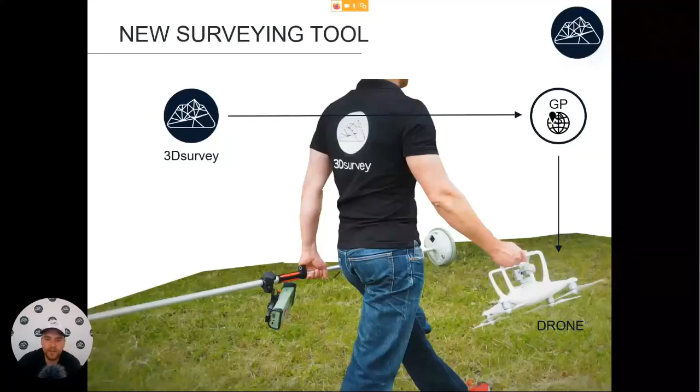So now let's go ahead and talk a little bit about today's program. So first, we will make some short introduction to photogrammetry and 3D Survey. We will talk about the drones that are available for purchase, what are their benefits, which ones make the most sense to buy. We'll also do some theoretical facts about drone technology, about photogrammetry and 3D Survey, how to map with images, how to do 3D modeling, and in the end, we will have some real case presentations.

So we will go through a project together in 3D Survey, from importing images to processing them, and then hopefully we will have time for a few additional case studies to check everything that's possible. And in the end, of course, there will be questions and answers and conclusion.

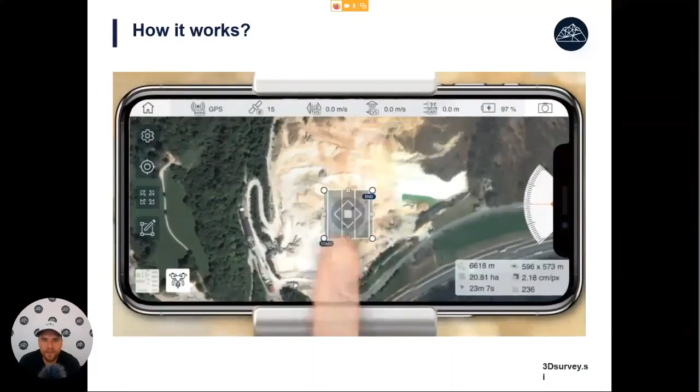Okay. Now let's have a quick look at how this technology actually works. So the 3D Survey ecosystem consists of software for piloting the drone and software for processing the data. So as land surveyors, what we do now, we just come out onto the field, we start up the machinery, go into the application for planning the flight, and we select an area of interest that we want to fly over.

We can set some flight parameters like flying height and overlap. After we are done, we just press upload the mission. We press a button and the drone will take off. So in 15 minutes time, it can cover an area of 500 by 500 meters. So that's pretty good. Or it can map a distance of road of more than 1.5 kilometers.

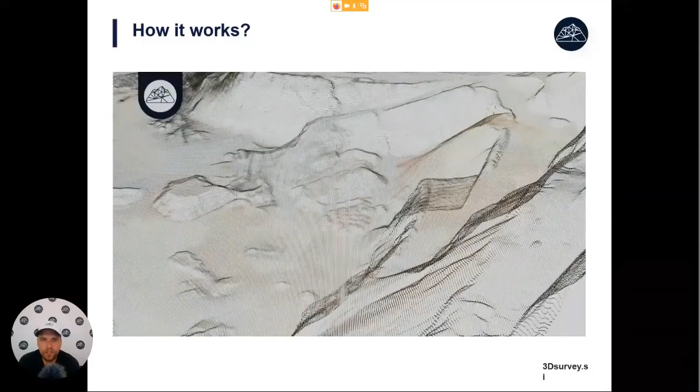After the flight is done, we get a lot of images. These we transfer to our PC where we process them and we get some final results. The first result type is the 3D point cloud. So this is a cloud of points, usually a few 100 million. It makes a very good representation of the natural environment. Out of the point clouds, we can create some 3D models, so watertight models, which can be used to extract contour lines from or calculate some volumes.

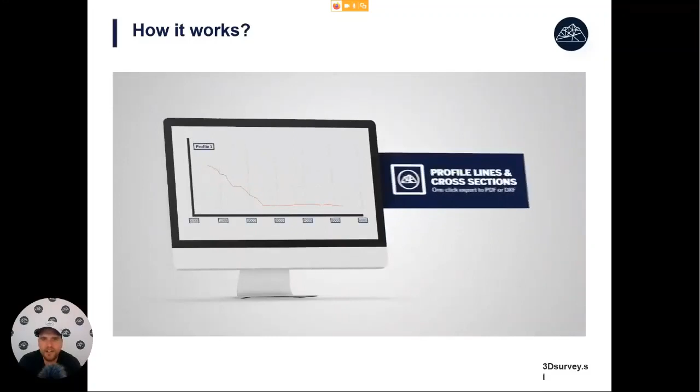So volume calculation is especially simple. All we have to do is select an area of interest and press calculate volumes. Also profile calculation, that has never been easier. All we have to do is select where we want to have these vertical cross sections and press calculate. So no more walking on dangerous cliffs.

And then last but not least, there is also a free viewer available. So here we create very accurate 3D models that your clients might not be able to open. And to empower them to use this 3D data, there is a free viewer with which you can just share these results so that the users can enter them and maybe make some simple measurements.

So for anything more complicated, of course, this is not included. Like volume calculations, you need to have 3D Survey for. We don't want to have your clients calculating volumes without you.

Okay, let's have a look at some bullet points of why to use drones in land survey. So they are proving to be a very effective method of getting spatial data, which is what we land surveyors do. They are also an independent method. You know, I started working in land survey as a student some 15 years ago. And very often when doing mapping, we would make some errors. So you mislabel some points when you map them with a total station, or you incorrectly connect some excavation site, and you can very quickly make a gross error.

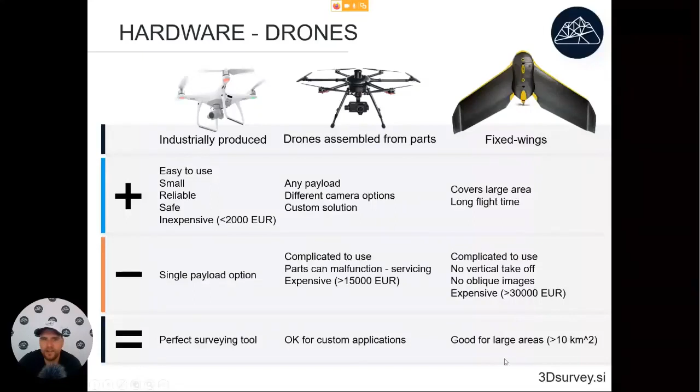The downside is that they don't have any oblique images and they tend to be quite expensive, so north of 30,000 euros. But they can be very good for mapping very large areas, like a new railroad project or a very big open pit mine. For areas over 10 square kilometers, these are the best way to do it. For anything smaller than that, I would go with the first option.

They have gyroscopes inside, which is one of the most important things that allow them to fly, because it tells them which way is up, which way is down. Something very useful is that most of them also have photo sensors. So if you try to crash them into a wall, they won't go. They will stop in front of the wall and start beeping. And some have IR sensors so they can also see in the dark.

So let's talk a little bit more about cameras. A few years ago, when we were starting with photogrammetry, people were using what we called metric cameras. Here we see an example of a metric camera. This one is called UltraCam. It's produced by Microsoft. These were the tools that were used to map countries or do photogrammetry. This kind of camera used to cost somewhere around $1.5 million, so not many companies were able to afford this kind of device.

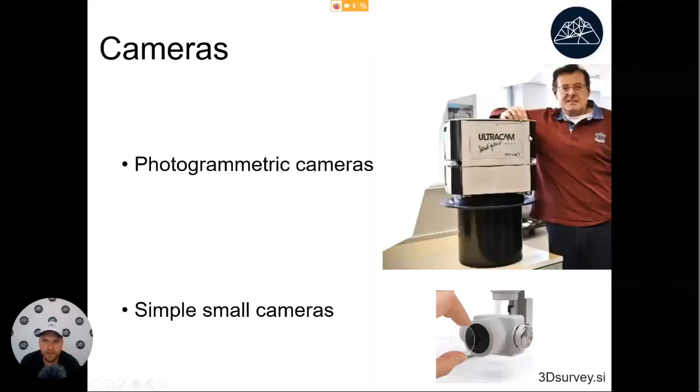What has happened in the last 10, 15 years is that the algorithms we use in photogrammetry became so much more advanced that we can now get better results from these simple small cameras than people got 15 years ago. This is an example of a drone camera. Its total weight is probably around 100 grams. And surprisingly, out of this one you can now get better, more accurate results than you would get out of this monstrosity that weighs 100 kilos.

Okay, when we talk about cameras, there is one important thing we have to talk about. And most people don't know about this one. But when it comes to cameras, there are two types of cameras. I think we have all seen this kind of an effect in videos. So wait, just a second. This is called rolling shutter effect.

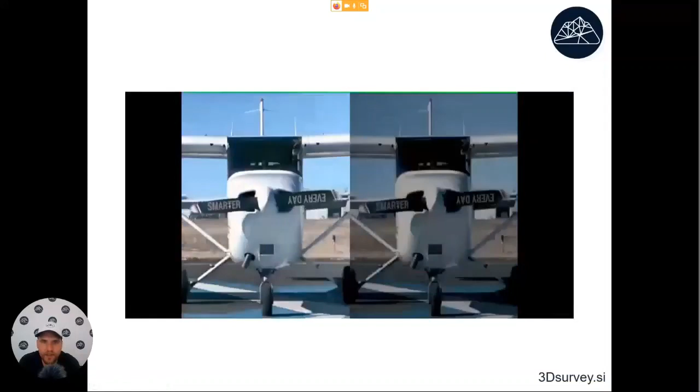And what causes this? So some cameras make the picture simultaneously. The whole picture is recorded at once. While other cameras, they are called rolling shutter cameras, and the picture is taken like that, line by line. So it turns out that when it comes to mapping, the most important thing is to have a global shutter camera, in order to get a nice picture without distortion.

Why is that? Because this distortion is hard to model. In order to model it, we need to calculate how fast the drone was moving, because the speed of the camera governs the effect of this distortion. So for most accurate results, we recommend you to always use drones or cameras with global shutter.

So the problem is, a few years ago, most of the cameras on the market were only rolling shutter cameras. So okay, this rolling shutter effect, it will be eliminated computationally. But if this effect is not present to begin with, we will be a lot better off.

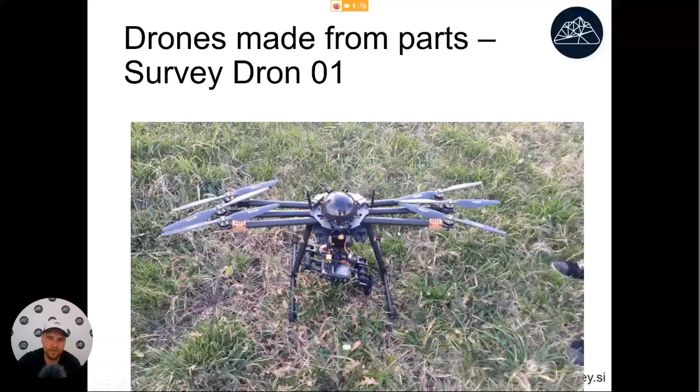Of more than 1,000 people I know that are using it, I know only of 2 crashes, and even those 2 were due to user error. After doing a survey, they were flying around and taking some pictures in manual flight, and then they maybe flew too close to a tree that had no leaves on it, and it got tangled into the branches and fell down.

But even those were pretty inexpensive to fix, so they just sent them back to DJI. DJI took out all the parts that they were able to use, and they sent them a refurbished drone for something around like $700. So for half of the price. So that's a pretty good one.

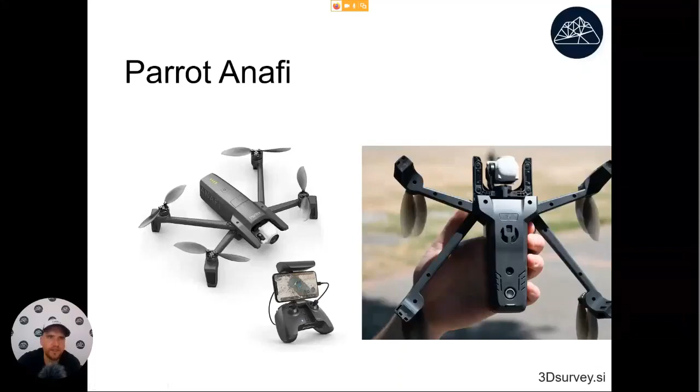Some clients don't want to buy DJI products because they are Chinese. So if you don't want to buy Chinese products, I think this is the best solution, for those people who want to have quality at an affordable price. Here in Europe and in the United States, this will mostly be government institutions, because they have some security concerns, and I think this is the drone to use for those kinds of applications.

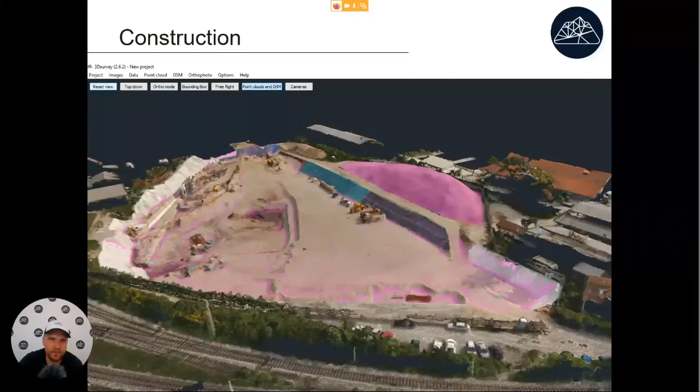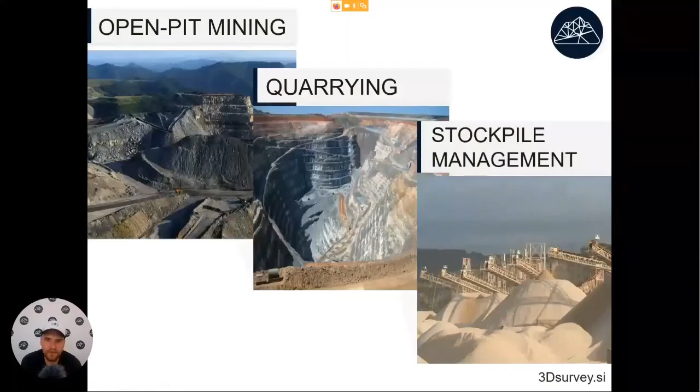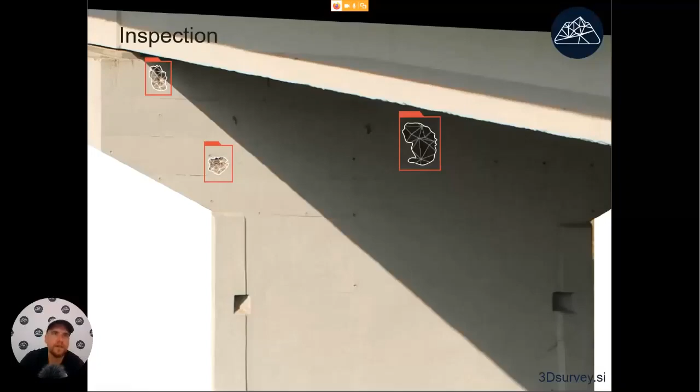Okay, last but not least on our list is the emergency response. Because drone survey is so fast, it's very useful for this kind of application. Sometimes you'll have some rock falls. You will maybe need to know how many trucks you need to take away this material.

Very often when we have this kind of project, there will be some geologists. In order to plan the defensive measures, they will need vertical cross sections to plan some defensive nets to stop the fall of rocks. With drones, we can get these results very fast. Actually we can have the results done the same day, so this will allow us fast response.

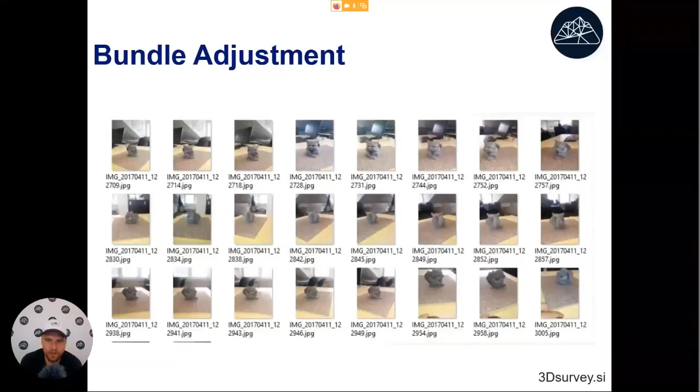If we have some images recorded from various angles of one object, and we don't need to have any information on the perspectives that the images were recorded from, just the images themselves will be enough to calculate the basic 3D shape of this subject, and they will also allow us to calculate where the images were recorded from. So now let's talk a little bit about how this is possible. We are calculating where the images were recorded from, and we are already calculating also the basic shape of the terrain.

So how this works: the whole bundle adjustment algorithm, we can split it into 3 parts. The first part is detection of feature points. There are some algorithms that allow us to detect interesting points. These points will sometimes be like a corner or like a blob or something. This first algorithm will find these kinds of interesting feature points. And for each of these feature points, it will calculate what is called a descriptor. It's like a fingerprint, a number that describes this point very well.

Then the second step of bundle adjustment is feature point matching. When we have feature points and descriptors, we take the first point on the first image and we compare it to the first point on the second image, and we see how well they match. We do this for all possible point-to-point combinations, and we try all possible image combinations. In the end, what we get are 2D matches between images.

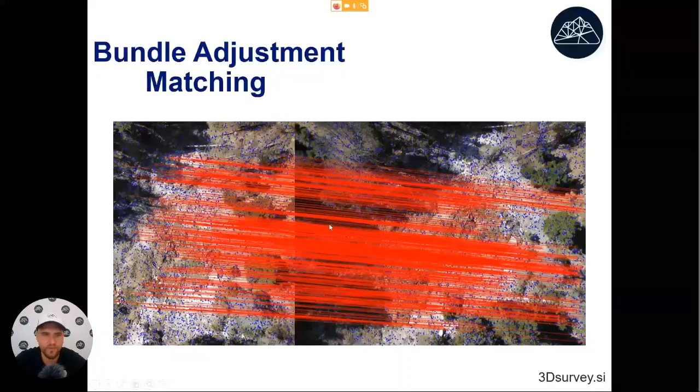So we have image 1, image 2. If they have a similar scale, then the matches will be like that. They will go in parallel. If they have different scales, they might go like that, or they can even be rotated, but always there will be a certain pattern to them, and that helps us distinguish the right matches from the wrong ones.

Then the main part of bundle adjustment is calculating the 3D data out of these matches. When we start, we don't have any information on how the images were recorded, one in relation to the other. It actually turns out if we have at least 5 matches between 2 images, we can calculate the solution, how the images were recorded one versus the other, just by making sure that all the rays intersect. There's actually some quite interesting math going on here, but for this demonstration I will just skip that part.

What's important to know is when we have matches, we can calculate how one image is recorded in relation to another, and it will also allow us to calculate the 3D positions of these feature points. So this is similar to the old days when we had total stations that were not yet total stations, but only allowed us to measure angles.

So you would place a theodolite on the first point and measure vertical and horizontal angles to some detail points. Then you would move to another one and again measure those detail points. And in the end, you would triangulate those 3D points. Well, here we also must calculate some more information. That's why we need to measure more points from the same positions. What's important is that these matches allow us to calculate the bundle adjustment.

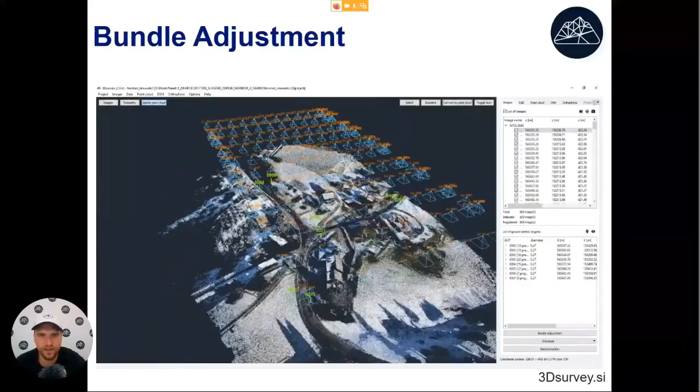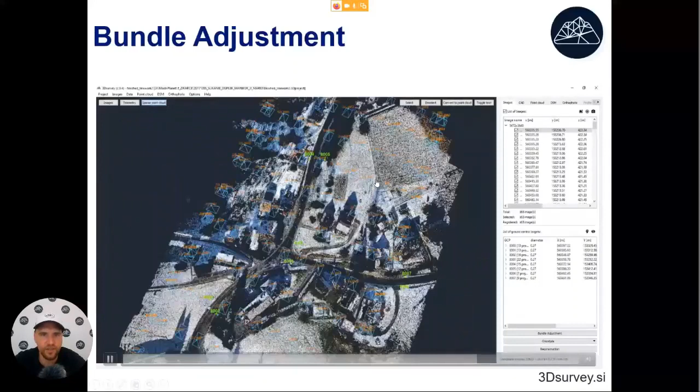So the result of bundle adjustment will probably look something like this. If we have a grid of photographs, it will allow us to create what is called a sparse point cloud. So these are those feature points in 3D, and it will also allow us to calculate the accurate positions where we recorded photos from and what angle the camera had when the photos were recorded. So that's the first important part. You will see later when we go to the software that it's completely automatic. You just press bundle adjustment, next, and it happens all automatically.

Then there is the second part. We need to make the 3D data accurate. At first, bundle adjustment may use some telemetry information from the drone, but usually it will not be correctly placed or rotated. So in the next step, it's important to make that data accurate. The best way to do that is by using some ground control points. So we have an option to georeference with ground control points.

Prior to the flight, we will place some ground control points on our terrain and we will measure them with a total station or a GPS. And then in the next step, we find those ground control points in our photos and we use that information to make our results accurate. Another option is to georeference with telemetry information. We can do that if we have an RTK drone that has centimeter-grade accuracy of camera positions.

And in that case, an even better option is to georeference with both GCPs and telemetry. Because with telemetry, you still have to know the drone is flying. For each measurement, it will have less than 1 second. So it's like mapping with GPS and only taking one measurement for each point you measure; it might not be accurate enough. So even if you have RTK GPS, it's still best to georeference with both GCPs and telemetry.

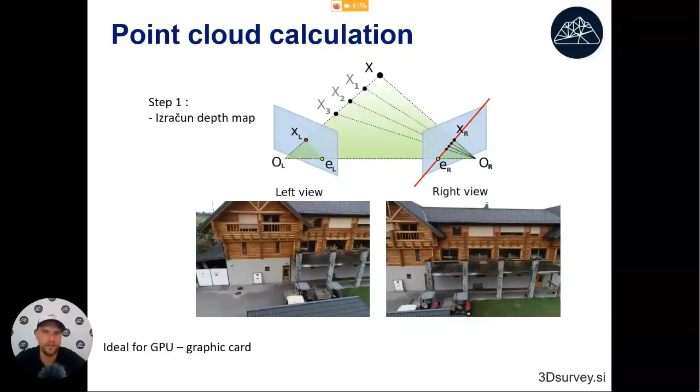Because we have to do that for millions of pixels at a time, this is ideal for GPUs, because GPUs have 1,000, 2,000, 3,000 cores. That means that you can calculate 1,000 pixels at a time, and in the end, if you have a GPU, it will allow you to get better results in less time.

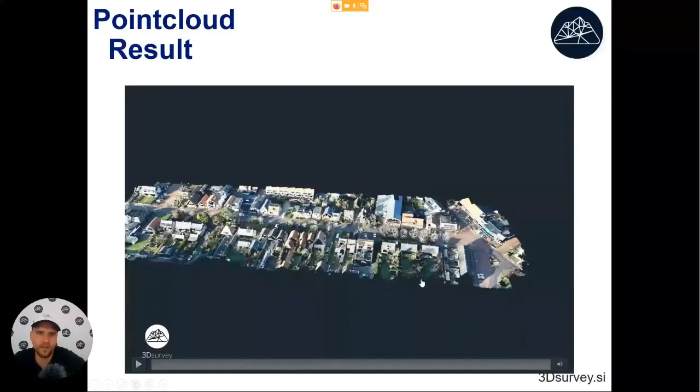Our result of point cloud calculation will look something like this. So here we have a nice point cloud of an urban area. This one is actually the Netherlands, I think. This was one flight with the drone. I think the length of this is maybe around 400 meters by 200 meters, so a small area. And the point cloud here has everything inside: all the trees, all the buildings, all the building boundaries, the fences, and this kind of stuff. So it's pretty interesting what the technology now enables. Because with a total station, we would probably need a few days to map this kind of area.

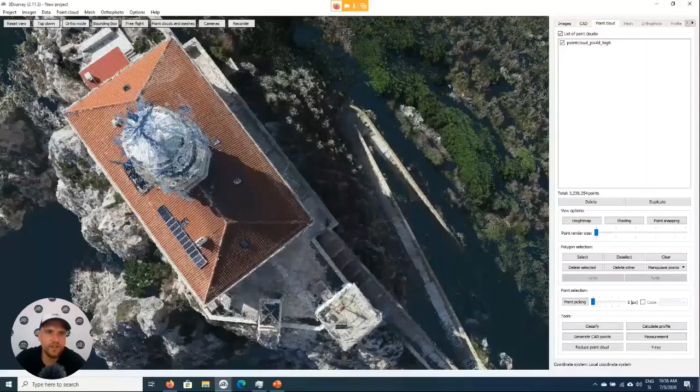Okay, let's check out an example of a point cloud. At this point, I would like to talk a little bit more about the point cloud. So let's see a real example. Here I have an example of a point cloud. This one is actually not created in 3Dsurvey, but in one of the most widely used software packages available. When we are calculating point clouds, it's very important how we do it. That will govern how much noise we get in our point cloud and how sharp the point cloud will end up looking.

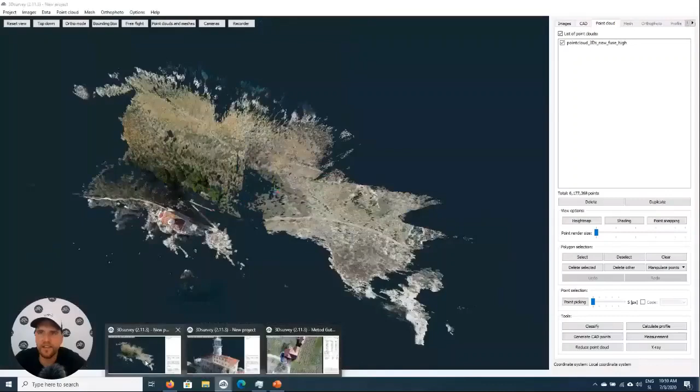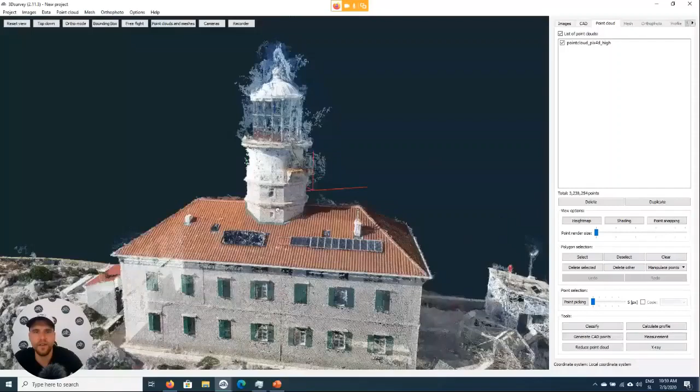So the competitive softwares may get you something like that. On the other hand, 3Dsurvey has one of the best point cloud algorithms available, so you will see that the result is a lot sharper. Here we calculated 6 million points with the same settings. In competitive software, we only had 3 million points, so that's only half. And okay, if only this was available, probably this would also look pretty amazing.

But if we want to map something, if we want to make some line work out of this, then it's very important that this data is as good as it can be. So that's why we also invested a lot of our time into getting this kind of data out of the pictures. We worked very hard in order to make this sharp and with as little noise as possible.

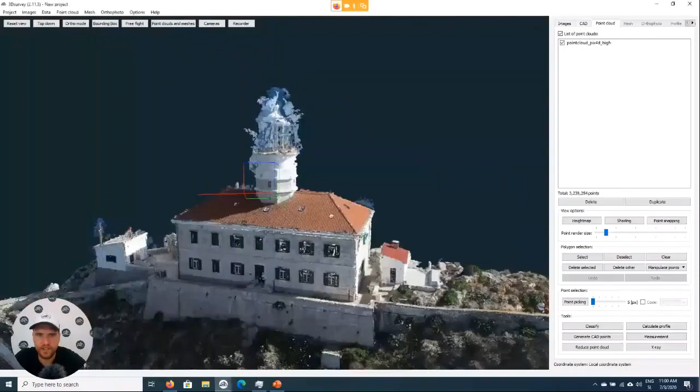So just one more time for the comparison, competition versus us. A lot sharper, a lot more detailed. Here you can even see the people who were flying the drone. Okay, let's go back to the presentation.

Okay. Now with point clouds, an important step of processing is also classification. As land surveyors, very often we need to know what the shape of the terrain is if we want to extract contour lines, for example. So usually when we get the point cloud, the first step will be to do the classification of the point cloud. In 3D Survey, this is very simple. It's a semi-automatic procedure. All you do is select the wizard, press next, next, next, and you end up only with ground points.

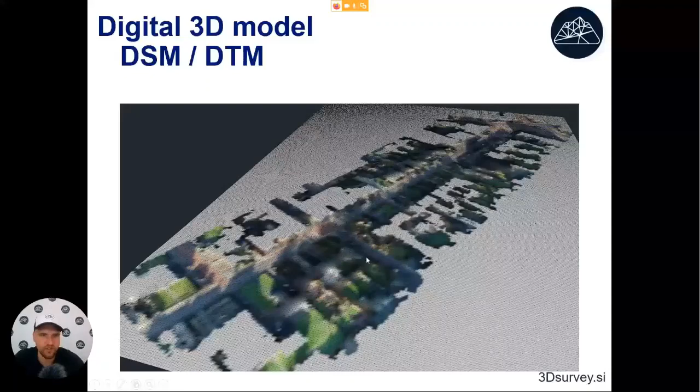So why do we use ground points? We use them so that we can later create a digital terrain model. Out of the ground points, we create a regular grid, and then out of this one, we will be able to extract contour lines and everything like that automatically. On the other hand, if we make a 3D model out of unclassified points, then what we get is a digital surface model, or DSM. This one also has buildings and trees and cars and everything like that present.

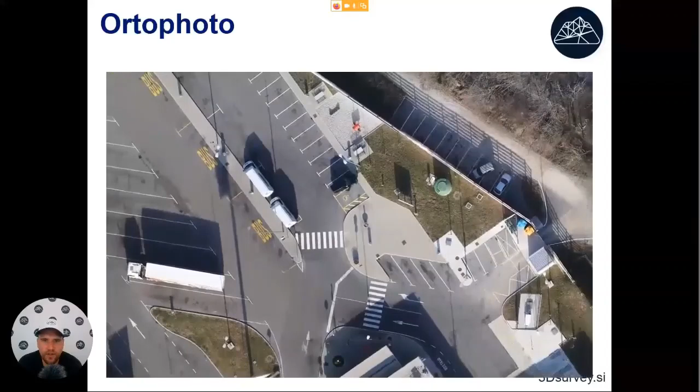So out of this one, you wouldn't want to calculate contour lines, but it can be useful to create an orthophoto. An orthophoto is a Google Earth-like image. If you look at it, you will see all the important stuff that we want to know about will be present in this image. It can be very useful to quickly draw a map of our area of interest because everything is present. So here it will be very hard to make some gross error, like incorrectly drawing where the building edge is, because we just see how it looks.

And now, if the orthophoto is calculated out of the digital terrain model, what we will get is the classic orthophoto. In that case, the building roofs will not be correctly positioned. On the other hand, if we calculate the orthophoto out of the DSM, then what we get is what we call a true orthophoto. In that case, the roofs of buildings and trees are also exactly where they are. So both have their benefits and weaknesses, and we will check that later.

Now let's quickly look at what kind of results we can get from this data. The first one is contour lines. Once we have the digital terrain model, all we have to do is press calculate contour lines. We select the equidistance, press calculate again. It just takes a few seconds and already we have the result. Now this we can export into CAD to be used with our survey drawing. There will be an export available, so pretty straightforward.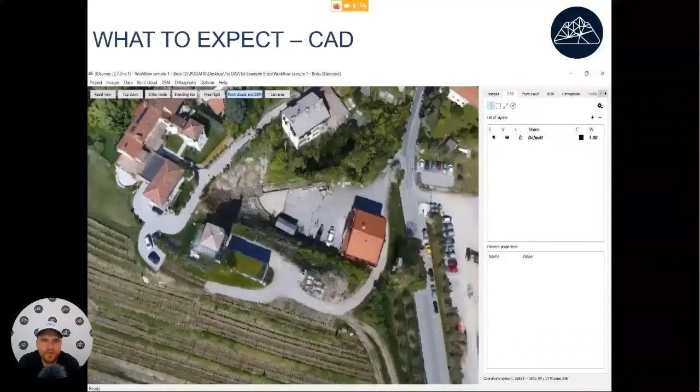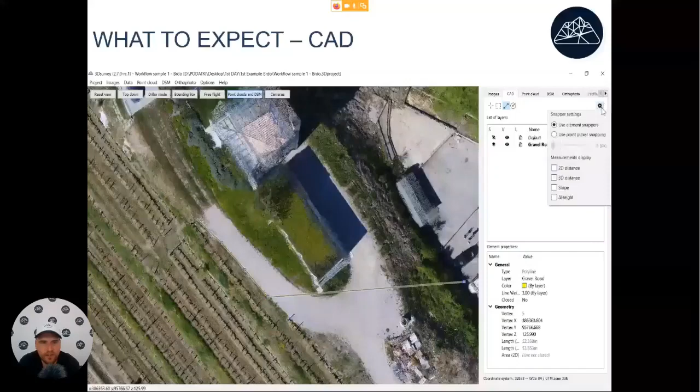Okay, let's go on. Next, one of the most interesting things is the ability to create line drawings. It will take a good team of 2 surveyors probably around 15 to 20 seconds to measure one point in the real world. So if we want to measure 100 points, it will take between half an hour or an hour at least. It will still depend a lot on the kind of terrain we are measuring.

So if we can, on the other hand, just draw these points in 3D instead, this will be a lot faster. Here you see it all. I have been speaking about this now for about a minute, and we already measured here 20 points. So this technology can be around 10 times faster than measuring points in the field, and it will be just as accurate.

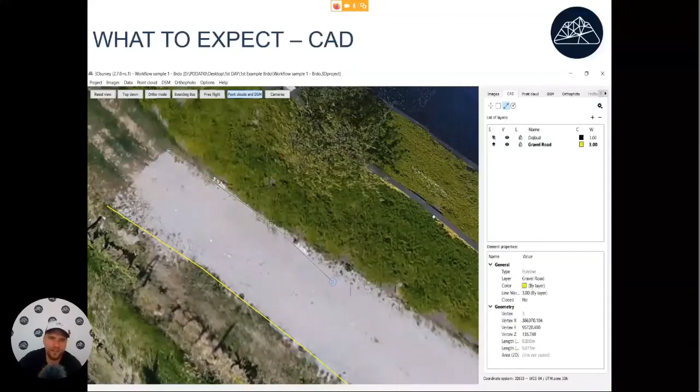We will check later what the accuracy of this data can be, and you will see that the accuracy we can get this way will be around 2 to 4 centimeters. 4 centimeters is something that you can be sure to get, but if you work well, if you make enough ground control points, what you can actually expect is around 2 centimeter accuracy.

So that's about the same as what you will get out of the GPS. And then instead of mapping everything out in the field, you can just make a 3D model and then map in your office.

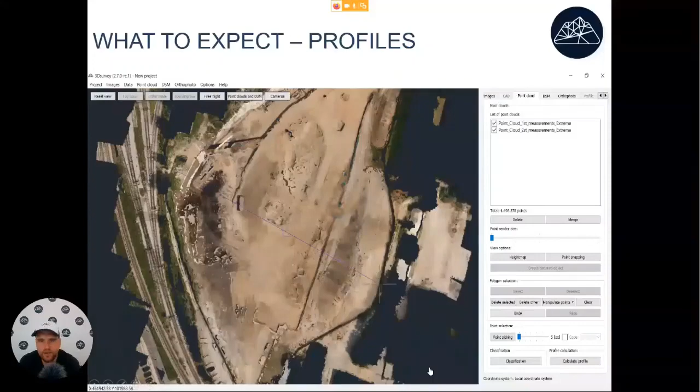Okay, when it comes to vertical cross sections, again, when we have the 3D models, all we have to do is select where we want to have the cross sections and we can just draw them. So, compared to walking down the line and measuring points all the time, again, a lot faster. And there's also an added benefit that after the survey is done, you can just select where you need vertical cross sections.

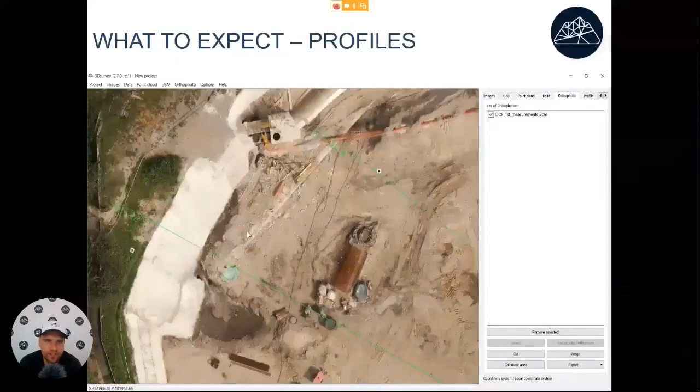So when I was still working as a student, as a regular land surveyor, very often it would happen. We would finish a project, and then a month later, someone would call us and say, "Hey, here we need to have some more vertical cross sections. Please go and make a few more." And then you would have to go there and make them at no additional cost. And it takes time, a lot of energy. Here, if you get that kind of request, you just create a new cross section where they request it, and that's it.

Okay, then volume calculations. So with this technology, volume calculations have never been simpler. Here we have an example. We have two point clouds. So for the two point clouds, we can create two digital terrain models. Then in order to calculate the volume, basically all that we need to do is select our area of interest. So if we were doing this for real, we would do that very accurately. Here we're just doing that real quickly just to show how it works.

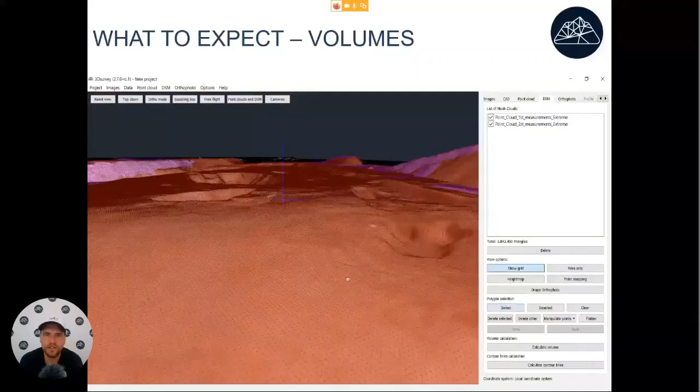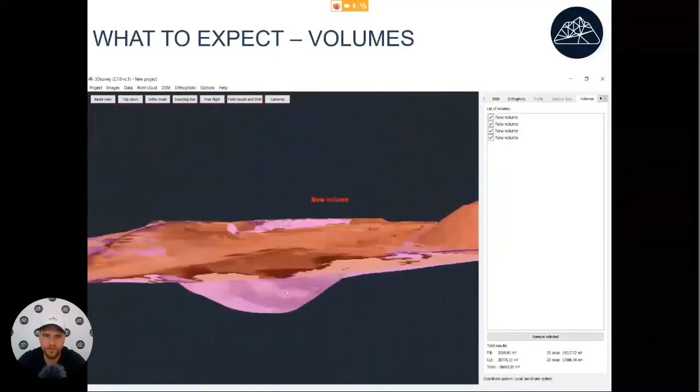So we can then see very well what the difference between the two surfaces will be. Then in order to get volume, you just press calculate volume. You just wait a few seconds, and already you will have the volume calculated. So pretty fast and effective technique. And after you do that, you can also get an automatic report on the volumes, in combination with some vertical cross sections. Projects that would take a lot of time and energy to calculate will be very simple.

Okay, so now also generate report, measurement report. Just select which volumes you want inside, which vertical cross sections, select the name for the file, and what you will get will be a Word document showing you where you calculated the volume, what the volume was, where we have those vertical cross sections, and also the cross section view.

Okay, so we've spent an hour talking.

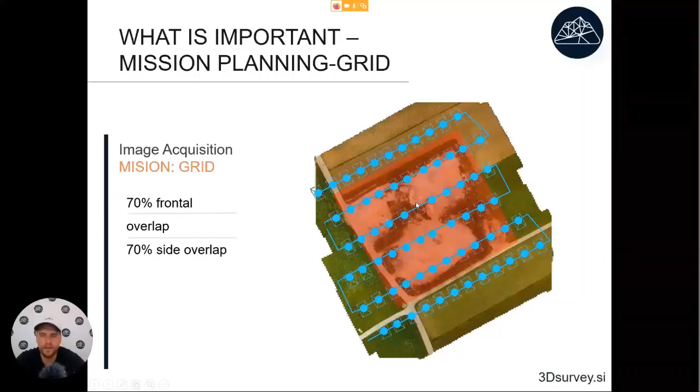So for longitudinal objects like roads, railways, something like that, it will be similar. Here it's important to always use a minimum of 3 lines. Sometimes people fly and they just make one line like that. In that case, you don't have any side lap, you only have overlap, and that's no good. So always you need to have a minimum of 3 lines. If you use 4, start on this point, fly like that, the drone will come back to you. So it will not take much longer than 3 lines.

For very big areas where we map 2 kilometer sections at once, we usually stand here in the middle and then we just fly the 3 lines and it's enough. And with Phantom, you can map up to 2 kilometers. Okay, maybe for a start only map a kilometer or a kilometer and a half. The problem when you do such big distances is the terrain can go up and down. You have to take that into account when you plan this mission.

And then, let's also talk about setting up ground control points. As we said earlier, the ground control points are the most important part that allow us to get good results, and it's important to spread them out nicely. So we will spread them out both horizontally and vertically. Ideally, especially if we are working with stockpiles, we will put one on the highest point, one on the lowest point, and also cover the XY extremities of our areas.

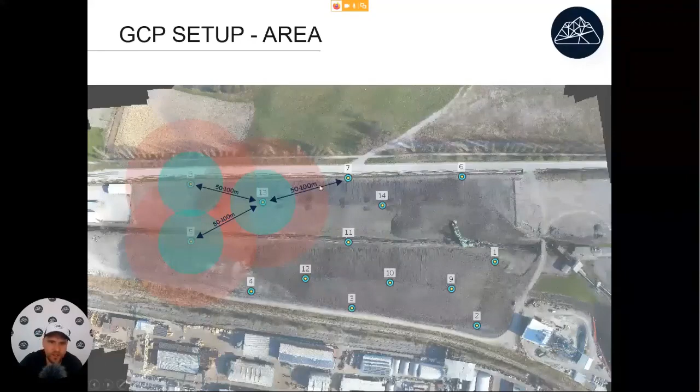And when placing the ground control points, we just try to place them so that the distance between neighboring ones will be between 50 and 100 meters. If we have a very big area, then we can also place them so that the distance between neighboring ones will be 200 meters, something like that.

If we are mapping roads, then the advice is similar. Again, we put them at a distance between 50 and 100 meters, but in this case, we put them on both sides of our linear objects. So 2 here, 2 here, 2 here, 2 here. It's good to place them together because then when we are picking them up, we will work faster if they are not that far apart.

And before we already mentioned the terrain, so our recommendation is when you do mapping, always start the drone from the highest point on the terrain. This is good for 2 reasons. The first one is safety. If you start from the highest point, you're less likely to crash into some tree or something like that. Another important thing to consider is overlap. If you start at some lowest point of the terrain, you set up the mission at 80 meters high so that the overlap will be at 80 meters.

Here the terrain and the house might be 35 meters higher. So here the drone will be only, let's say, 45 meters over this house. That means the overlap will be less than 50%, and that's already a critical value. That means that images are not overlapping over the whole area, and this part may probably not even calculate anymore. So you can get holes in your model. So always start from the highest altitude, and even over the objects you will get good overlap. Just a general word of advice.

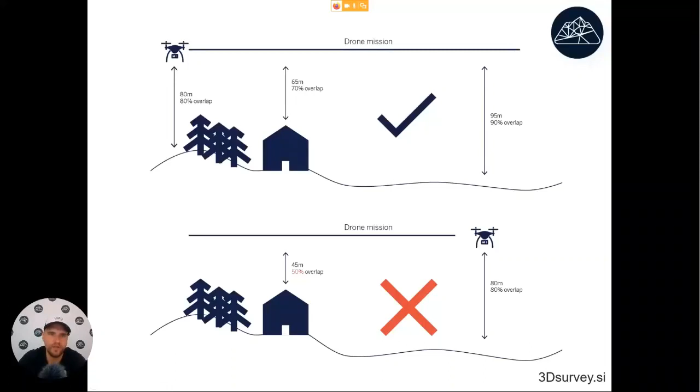Okay. So now we did the theoretical introduction. Now let's look in practice at how processing a dataset works. Let me open a new 3D Survey window, and I have here a nice small project that I can process in real time. So this is 3D Survey. To start processing, we can just click images, load images, or we can click here on new project. Now I'll just move to this presentation folder. I have here a nice small data set of

34 images. After selecting the images, the software asks us if we want to import the telemetry information. Most drones write telemetry information into EXIF data. Other ones will write it in a separate file. Here we can set our coordinate system and our geoid model like that, import.

So what we have now, here we have where we flew the drone, and we also have information in 3D where we recorded the images from. Now, as we said before, what we have here are images and very approximate positions where the images were recorded from.

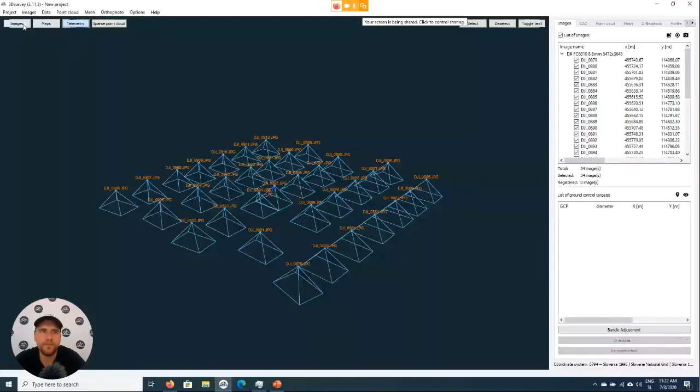Okay, before the flight, we placed around 10 ground control points out on the ground, and we measured them with the GPS. Now let's start the processing. As we said, the first step is bundle adjustment. This one is completely automatic. We just press OK and we start processing.

Bundle adjustment is a pretty fast algorithm. For these 34 images, it will take less than 2 minutes. If we had 600, 700, 800, 1000 images, it would take maybe an hour, maybe 2 hours. Again, it will also depend a lot on the speed of the computer, but it goes up a little bit exponentially. So if you have a twice as big project, it might take 3 times as long to calculate than the smaller one.

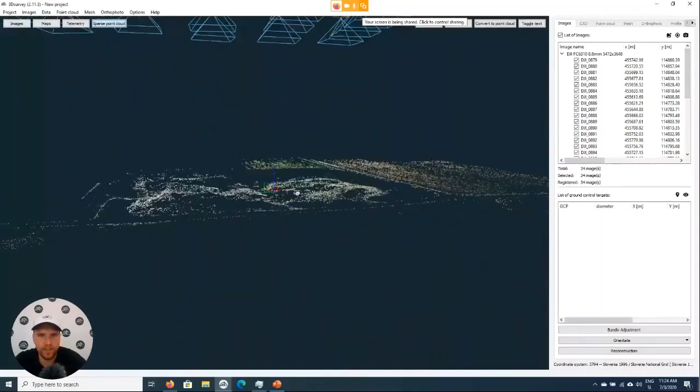So now the feature detection is already done for the images, and those features were matched between the different images. And now the software is already calculating from where the images were recorded. This laptop is a pretty good one, so it will finish just about now. And this is the result of bundle adjustment that we get. We get already the approximate shape of the terrain, and we get more accurate positions where we recorded these images from.

Now comes the second step, that will be georeferencing or orientation. Here we will now add the ground control point information. I have the ground control points here in this GCP file. The file with ground control points just looks like this. We have a point name, easting, northing, and elevation. Okay, let's close this. Import. Now let's go to the next step.

Now here we just need to find the approximate positions of these ground control points. Our software has one of the most user-friendly methods of doing that. Here is already our first ground control point. And these red dots are the feature points that were detected automatically. That's why when we mark one ground control point on one image, we also know its position on all the neighboring images already. And because of that, we only need to mark 3 ground control points.

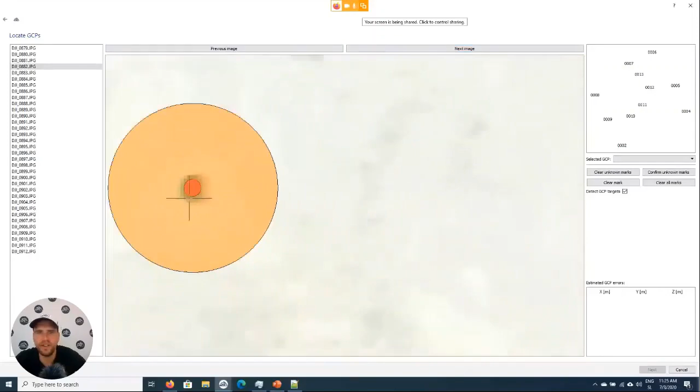Here is already the second one. Ideally you will not mark 3 that are exactly in a line. Usually this won't happen if you select sort of okay. Here is the third ground control point. After we mark the third one, the software will automatically recognize which ground control points we have already marked. Now what we can do is just check. It's important that all the ground control points are inside of this circle.

If we want, we can also improve the position of this one a little bit. Like that. Maybe let's check it also on the other side. So 12. I see this one was causing us a little bit of problems. We'll just remove that one. 13 we will just clear. Okay, now everything fits together. One click was not accurate enough, but now we have what we need. All the ground control points are inside of these circles.

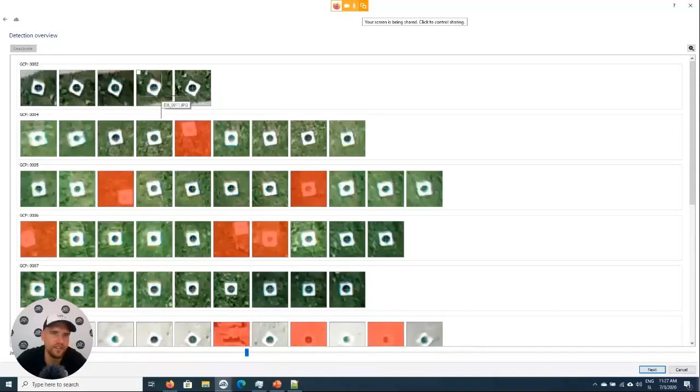Then we have here this detect GCP targets checkbox. The software will go inside of this circle and try to detect the center of the black dot. And here we already have results. For example, ground control point number 2 is visible here on images DJI 899, 900, 901, 911, and so on. Here we just go quickly through it.

We could add this measurement manually, but it has a little too much glare, so we will just disable this one. We just check how the automatic detection went. It went perfect. We could select or deselect points like that. For example, we can remove one like this if we don't want it, but it's okay, so we'll just leave it inside. Then we just press next, and this information gets added to our 3D model.

And then what we get here are ground control point errors. So that's now the difference between where we have measured our ground control points with GPS and where these ground control points are in our 3D model. So here we see that we get around 2 centimeters. That will be the maximum offset.

So a good rule of thumb for this data is to say the end accuracy of the results will be about similar to the worst error that you get in here. So for this one, probably we would get around 2 centimeter accuracy. If one point here would have 4 centimeters or more error, we would just go back and check how that point was defined. Now let's just press finish. And now our model here is georeferenced with these points.

Okay, now let's continue on. So we have here a point cloud. The next step will now be point cloud calculation. This part is actually the one that takes the longest, but in our software you will get the best result available. On my machine it takes around 1 hour to process 100 images. So here we have 34 images that might take around 20 minutes.

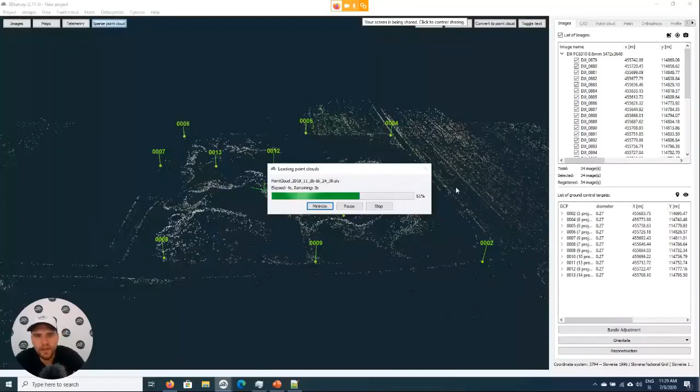Too long for us, so I will just load in a pre-calculated point cloud that I already have here, just in order not to waste any time. And this is the result we would get after some 20 minutes of processing for this small data set. Okay, but this is an area of 100 by 100 meters. So in order to map it, probably half of the day with a total station.

Okay, so here is already our point cloud. We already have a very good feel for the 3D shape of the terrain. But now the first thing we need to do is calculate the digital terrain model. So we will just quickly classify this point cloud, and we'll also see how the classification algorithm works. Here we have some settings for the classification algorithms. These settings really work for 99% of all the cases.

We just press next. The algorithm is semi-automatic. We just select one point on the ground, and the software goes through all the points and checks the height difference between them. If they are on similar height, it will say, okay, this is terrain. Vegetation here is too high, so from here to here there's too big a jump, this is not terrain. So it's very simple, but it gives one of the best possible results. Others use more complicated stuff, but it gives you a lot of wrong information.

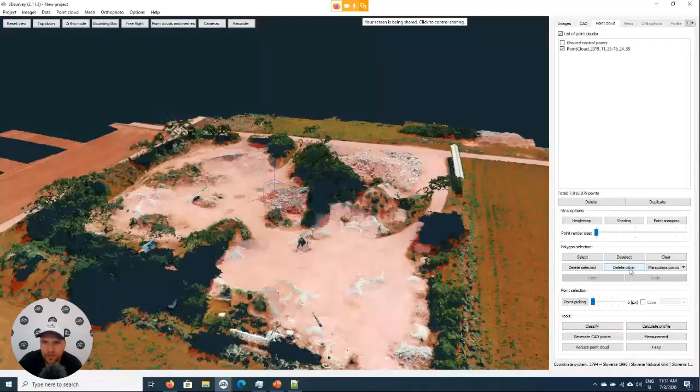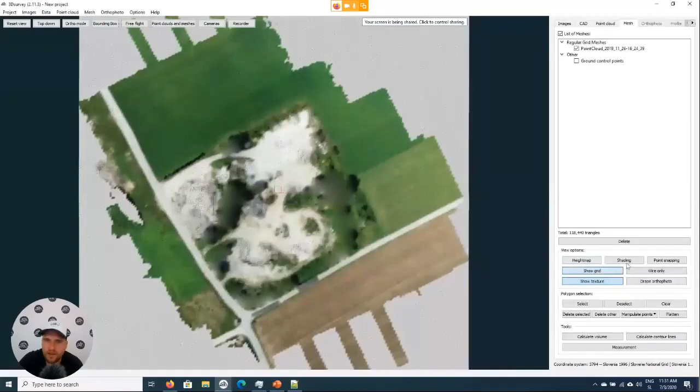Then in the next step, we just do a little bit more filtering. A new surface is calculated, and then all the small bumps are excluded. So now we'll just press finish, and we will use this delete other tool to temporarily delete all the non-ground points. Okay, and out of these ground points, we will now create a new digital terrain model. Just press calculate, and already we have a digital terrain model.

Now, as we saw earlier, calculate contour lines. Just press calculate contour lines, select the equidistance. We can leave it at 1 meter or put it lower, 0.5. Okay, it can be 2/3 of a meter, it doesn't matter. Continue. They are calculated almost instantly.

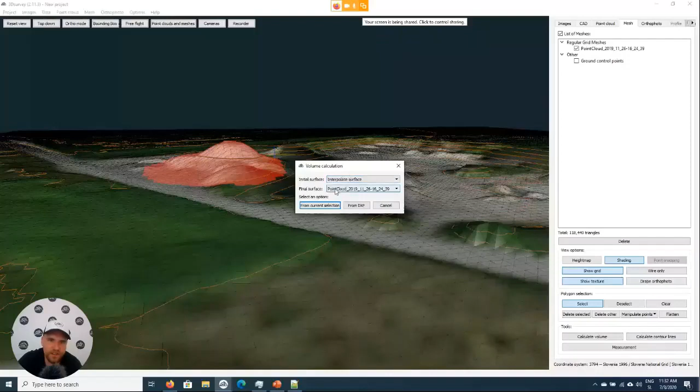On the other hand, if we want to calculate volumes, again, just select an area of interest, just like we showed you, press calculate volume. We will interpolate the initial surface. If we had two surfaces, we could also choose the initial surface. The final surface will be the one that's in the point cloud from the current selection. And bam, we already have the volume, so around 600 cubic meters here.

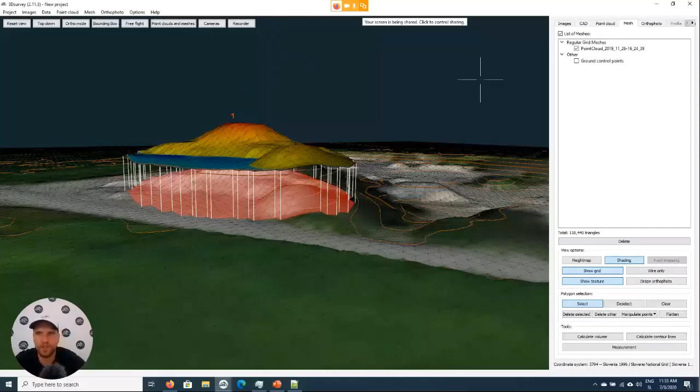The bottom surface in this example gets interpolated out of the boundary. So here you see it goes a little bit up. So it's very important how this bottom surface is defined. This is most suitable when we have a pile of material on flat ground or excavation of terrain from a flat area. For other examples, when calculating volumes, it's best to do measurement 1 before anything is happening, and then measurement 2 afterwards, and we just compare the two surfaces. Okay.

After we calculate the digital terrain model, we can also create the orthophoto calculation. I'll just turn this volume off. So here we now have the mesh. Out of this mesh, we will now create the orthophoto. Press calculate. The orthophoto will calculate pretty rapidly, especially because we have a small area, but for bigger areas, like 500 or 600 images, it will take maybe 15-20 minutes.

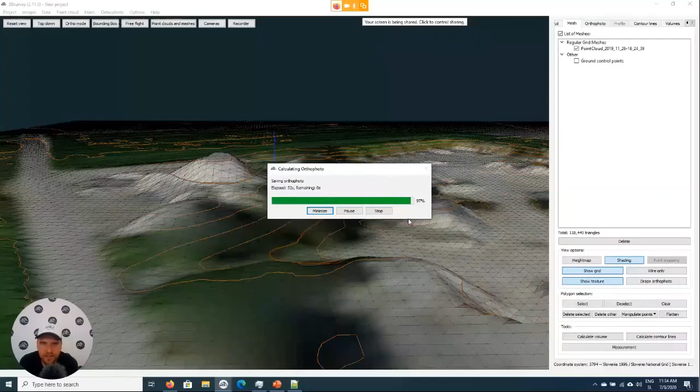In the first part, the images are reprojected onto the digital terrain model, and then they are also color corrected, in order to get a result that will look like one picture.

So, okay, now the process is also saving the result. I'll just turn off contour lines in order for them not to display over the orthophoto. Okay, so this is now the traditional orthophoto. What's special about this one is that the roof is not in the correct position, but the roof edge is very sharp. And also the detail here in these rocks is very sharp because it's calculated using a traditional algorithm.

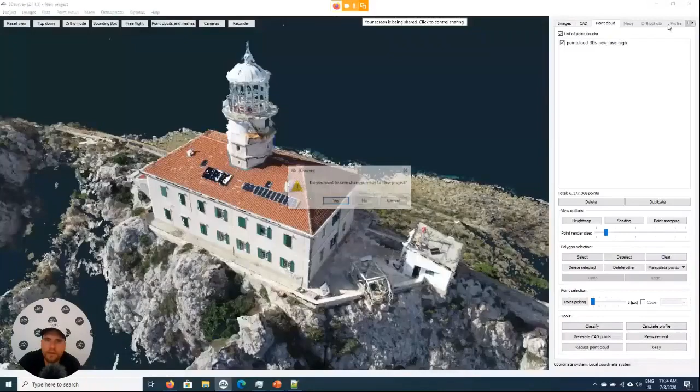So another option would be, I'll just close some projects here. Close this one and open a new window. Another option would be, instead of calculating a digital terrain model, to create a digital surface model. So that's a 3D model that also has buildings and trees included. Just have a quick look at the memory, what's happening with it. Okay, perfect. We still have way more than enough.

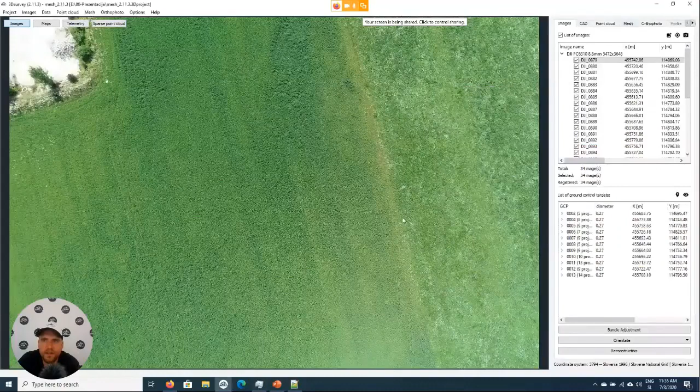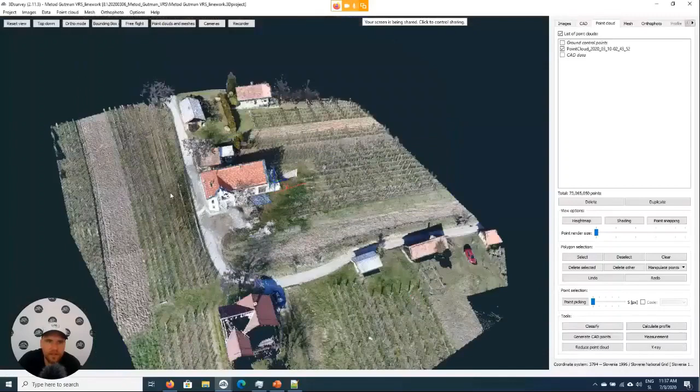Now, at this point, I would like to move to the second example, where we will check what we can do about line work. So maybe now I will just close this window. So here I have an example of a house that we mapped. This was a cadastral application, and the area of interest is like 100 meters. Because it was that small, it allowed us to record a lot of pictures. We flew around the house a few times, and that really allowed us to get very detailed 3D models. Here you can almost see what the people doing the survey were eating.

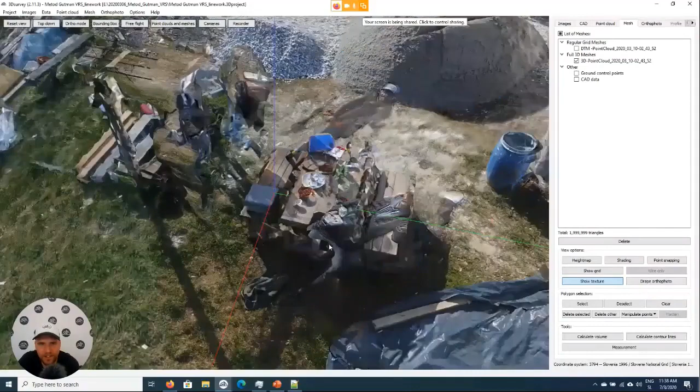If we check it in the 3D mesh, this will be even sharper. Okay, and some people got pasted onto the image here. We were moving around, so that's why it looks like that. What's important is, this is a new building, and we made a map out of this one.

So what we did for this one is these points, the blue ones, we measured them with the total station. And you can see exactly where, when you measure with the total station, you hit just this point here. For example, for the highest point of the roof, this is what we can measure with the total station, but the actual point should be up here if you drew it out of 3D.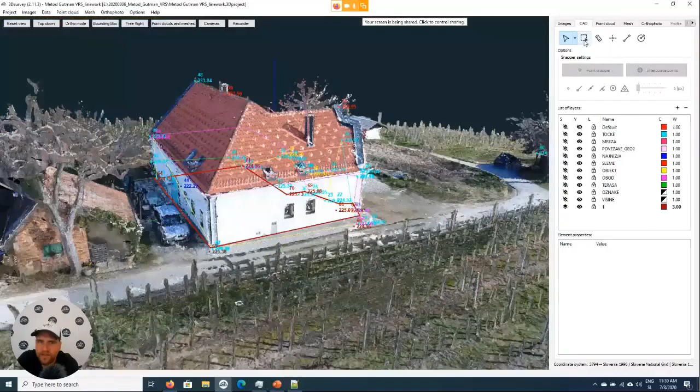Now, our 3D Survey has an integrated CAD engine. So here you can choose to draw on the point cloud or on 3D models. If I draw lines, I can select that I want to have points on vertices, and I want to snap on point cloud points. I'll just use this layer, for example. So now we're just snapping on point cloud points and drawing the lines. So instead of mapping everything with a total station, you can just draw the lines here.

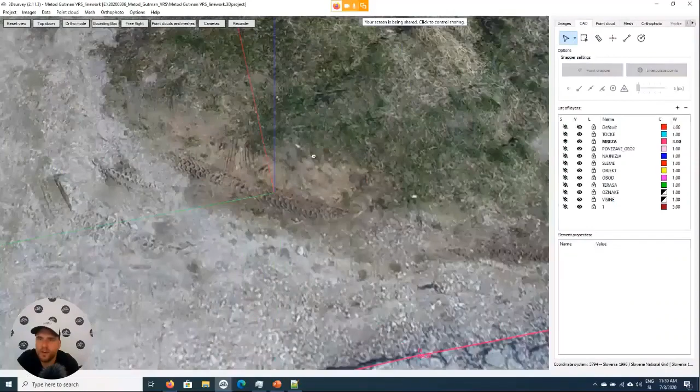Another, maybe even better option than drawing on the point cloud: we can turn off the point cloud, go here, and draw on the mesh. So this is now the 3D mesh. Like that, we are drawing directly on the mesh. So anything we draw like this is automatically in 3D.

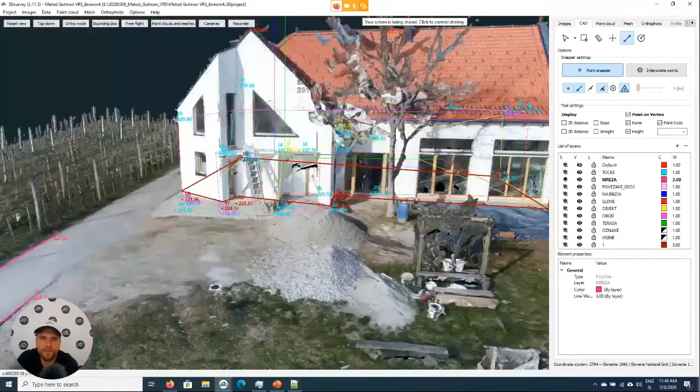So, and here, just for comparison, here is the outline of the building that I made out of this 3D data. And the blue and yellow points are the ones that we measured with the total station. So accuracy-wise, I would say that photogrammetry can even give you a better result than the traditional techniques.

Now, one of the things that tends to be slightly hard is to get to these corners very accurately. So here 3D Survey has an ace up its sleeve, and this technique is called point cloud X-raying. So let me show you how this works.

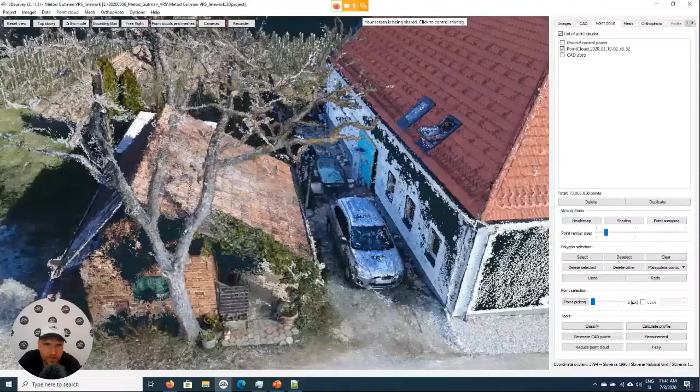Just select point cloud. So the problem will be, in the point cloud, to get these edges, or maybe this one will be an even better example, because you see here the wall of this object is below the roof. So if you want to extract this out of the point cloud, you might struggle to get the correct point down here. But with X-raying, this will be simpler.

We just select the resolution for our X-ray, press generate, and what we get is sort of like taking an X-ray at your doctor. So then the walls of the buildings will come out looking through the roof like that. So what we can do then, we can paste that X-ray onto our digital terrain model.

We can go to CAD, just turn the point cloud off, and then you can just draw where the building wall is, because the building's walls come out like this through the roofs. And if we check here, we see that the accuracy is pretty good. So, okay.

So now this was a second example. I see we are some 10 minutes over our time limit, but I'd just like to make the third, last example. So we now checked how we can do line work, how we can get the 3D data. I also want to do a very quick demonstration on the volume calculations. So I'll just open a new window of 3D Survey, maybe close this one.

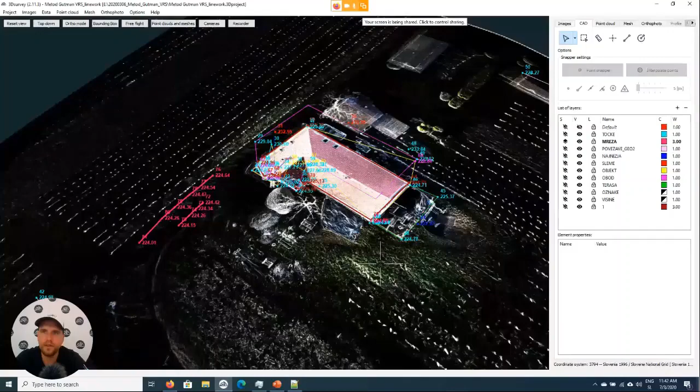Okay, here, let's just switch to this view. And let's also look at one construction site project. I have an interesting one here, construction. So in this project, what I want to show is 3D Survey is not just a tool to create the 3D data, it's also a tool for analysis of the data.

So here we don't have any images inside, we just have 2 point clouds imported into the software. So this was the situation in the beginning on this construction site. This was the situation maybe half a month later. So we'll just quickly make 2 digital terrain models like that. Digital terrain model 1, digital terrain model 2, calculate.

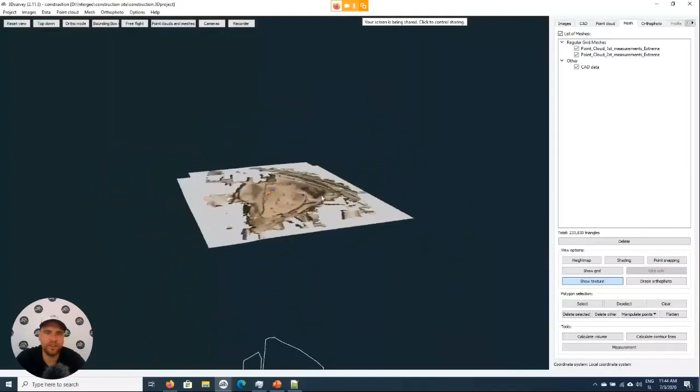We could do it like before, just manually select where we are calculating volumes, but actually it goes like that. The civil engineers will give us an area of interest, they will draw these lines and they will say, okay, calculate what's happening inside of this excavation site and what's happening on the pile. This is now in 2D, that's why it comes out like that. If we want to see exactly where it is, we just go to ortho and top-down mode.

Now, in order to calculate these volumes, like we showed earlier, just select calculate volume from DXF, select that DXF with boundaries, and we already have the volumes. If the boundaries had been on layers with names, we would also get the layers, but I'll just write here excavation. And the second one is the pile.

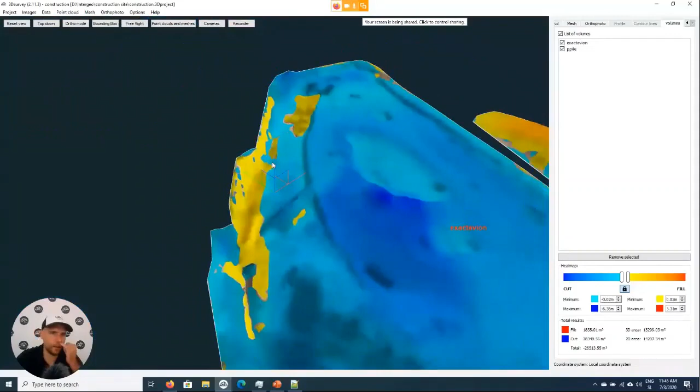Okay. We now have our volumes in 3D. We can already see them pretty well here in the volumes tab. It shows here where the material was added to the site and where it was taken away. So here most of the material was excavated, just here a little bit was added. And here the situation was a lot more complicated.

Now the second step will be to calculate some vertical cross sections for the report. So this one, calculate profile. I'll just quickly make 2 of them. So here is the first one. It's already visible here in 3D and here in 2D view. Let's make another one. And we also have another one inside.

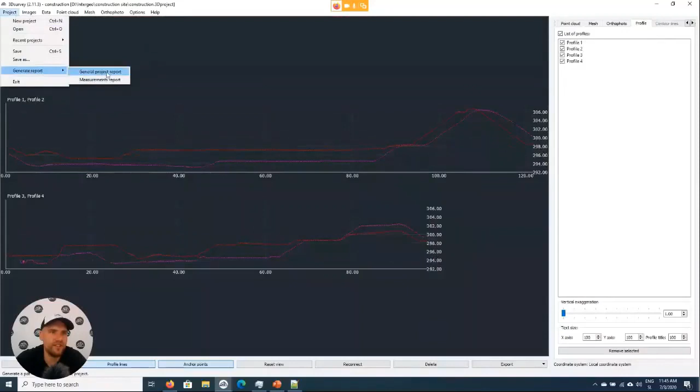So now all we have to do is generate the report, measurements report. It's already set. Here I want to also add the volumes, calculate.

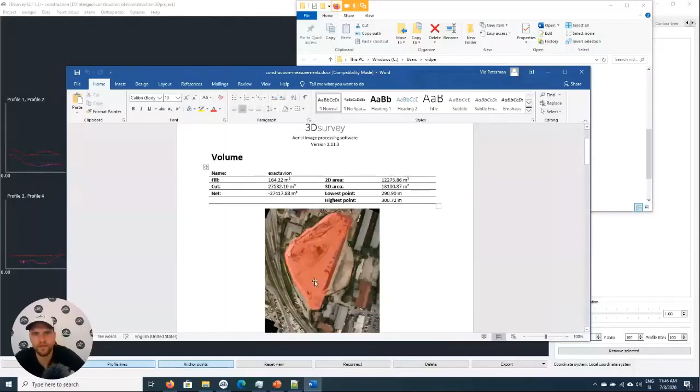And that's it. Here's our report document. It's a Word file, so you can easily add in your company logo, and you get the first area where we calculated volume, second area, and where we have vertical cross sections and the cross sections themselves. Okay.

Now, last but not least, I just want to open one. So very often the question about this kind of data is what will be the accuracy of this? So I have here a project from one of our customers who was wondering just that. What kind of accuracy can we get from this data? And first of all, she had to have a very good GPS, because she measured some 200 points in her area of interest to check the accuracy of this data, and it came out very, very good. So we will see this later.

Just wait for this to load, and in the meantime, I'll just close this one. Okay. So here is her point cloud. So what she did is she measured. So one of very good functions of 3D Survey, you can do this trick. You use load CAD, and then you just select a txt file. So in this txt file, we have some point name, x, y, z coordinates. Load this one in, import.

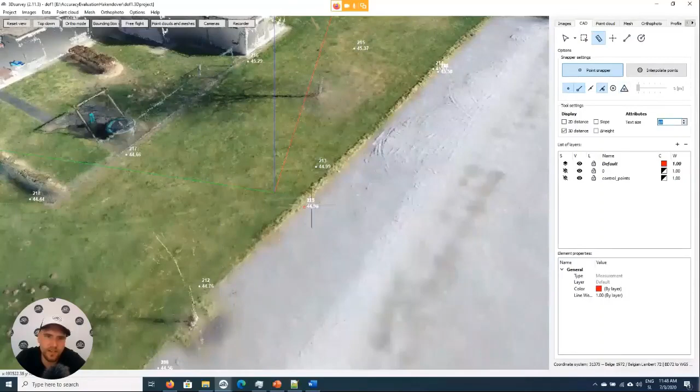So here now in this tab, we can then just check for each point the delta height, what the delta in height will be between this point measured with GPS and the point from the point cloud. Let's make the text a little bigger. We will be snapping on points. Let's check this one. And we don't want 3D distance, we want delta height. So here we see around from 0 to... okay, no, I just have to repeat this because now it's still showing that one. Now it will be showing delta height.

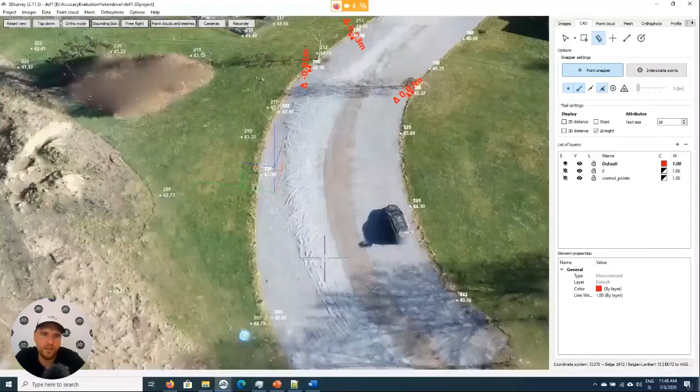So this one is actually around 2 to 3 centimeters. And we can just check for a lot of them. So most of them will have a difference of less than a centimeter. So this one is 0.001. Okay, let's leave it at 1 centimeter. Let's check this one. 1 centimeter, 2 centimeters. And we have 100 of such points. Okay, in the grass, the difference will be slightly bigger because with photogrammetry, we measure the top of the grass. With GPS, we stick it in a little bit, so that will quickly add a centimeter or two.

Other than that, we can easily check the accuracy. So for this data set, we had some 200 points. We measured the accuracy. So here, on average, the offset was, I think, around 1.8 centimeters, something like that. So pretty good if you consider how much data we have in here. And it would be kind of pointless to spend 2 days mapping this area with a total station if we can do it in half a day instead with the drone. So, okay, these were now some practical demonstrations.